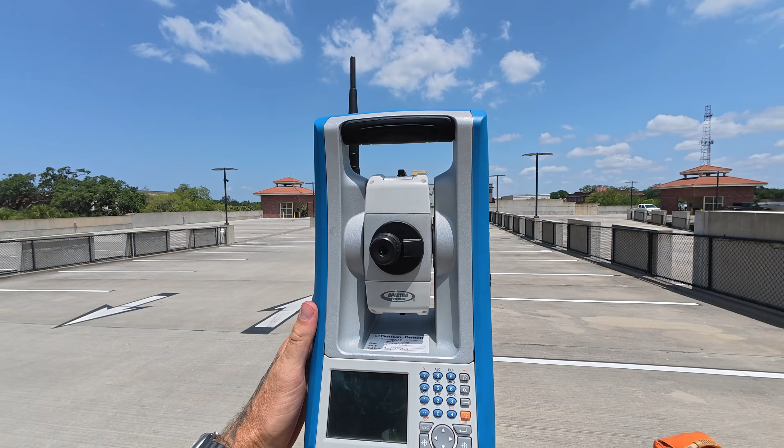Today is all about the vertical component of traversing, or using a total station to transfer the elevation from one point to another. We're going to cover how it's done, the errors associated with it, and I'm going to outline a novel technique to increase the vertical accuracy of your traverse to a point where it begins to rival what is capable using a differential level.

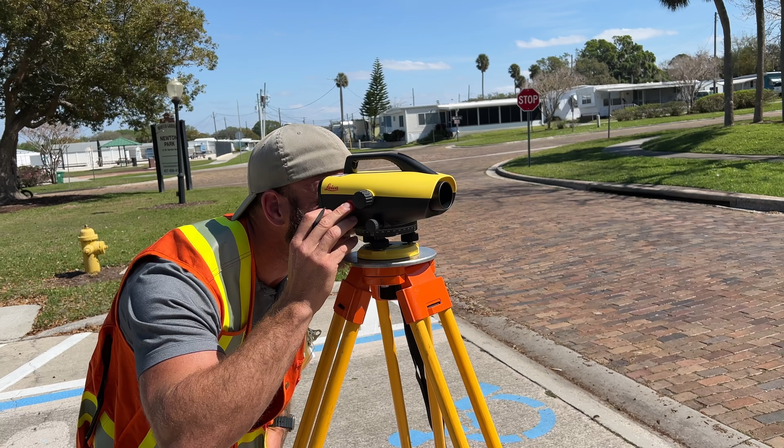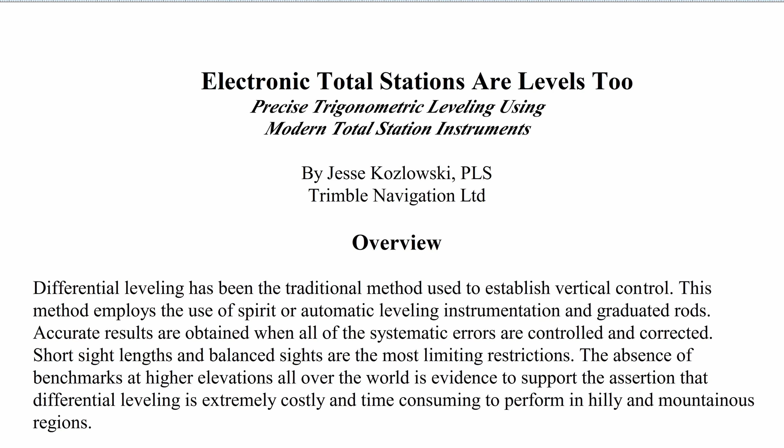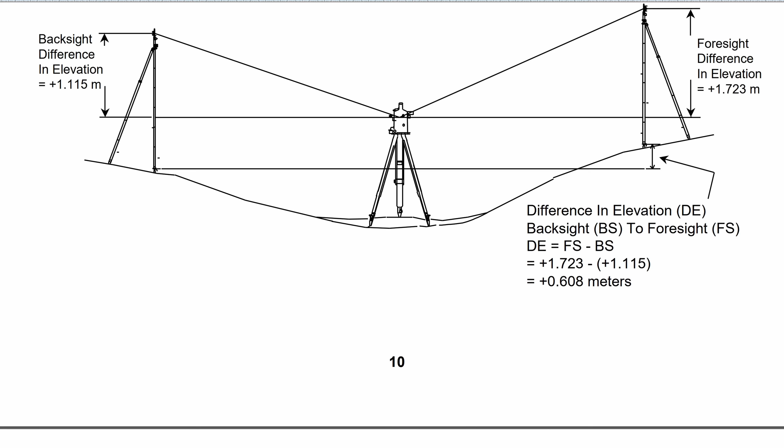A few weeks ago, I was sleuthing through LinkedIn when I came across a discussion on the merits of trigonometric leveling. In that conversation, a professional surveyor by the name of Jesse Kozlowski linked a paper he had written almost 30 years prior outlining a method of trig leveling that eliminates the largest source of error we surveyors encounter when transferring elevations using a total station, the manual measure-ups to the height of instrument and height of target.

As I read through Jesse's paper, I couldn't stop myself from trying to figure out a way to take the theory behind the method he was outlining and use it to increase the vertical accuracy of a traverse. You see, Jesse's method is for one-dimensional surveys, when all you're after is elevations. I wanted to tweak it to borrow the benefit of mathematically eliminating your measure-ups, but while still performing a traverse, which allows us to define horizontal coordinates at the same time.

So I poured a cup of coffee, popped in a Zyn, and got to work. After messing around with some old data in StarNet, I started to realize I was onto something. That was a few weeks ago, and since then, I've field tested this new method I'm proposing, and the initial results are very promising.

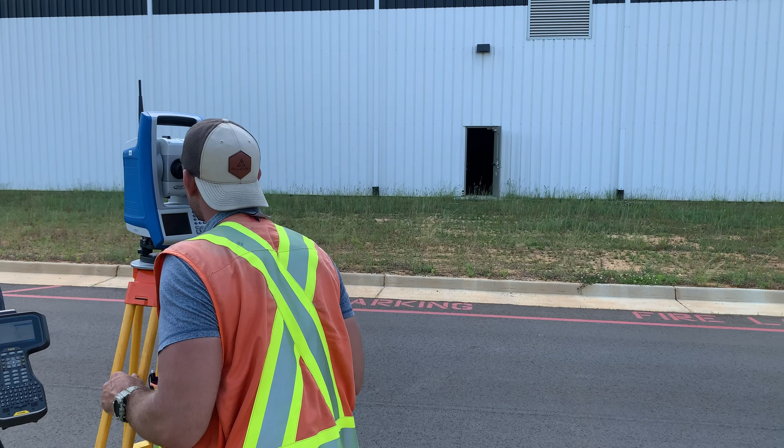I believe I'm now at a point where I can share this method with the surveying community to offer an alternative to those situations where you need highly accurate coordinates in all three dimensions that have in the past typically been performed by 2D traversing followed up with a differential level run. This method is significantly faster and carries several other benefits as well. Let's get after it.

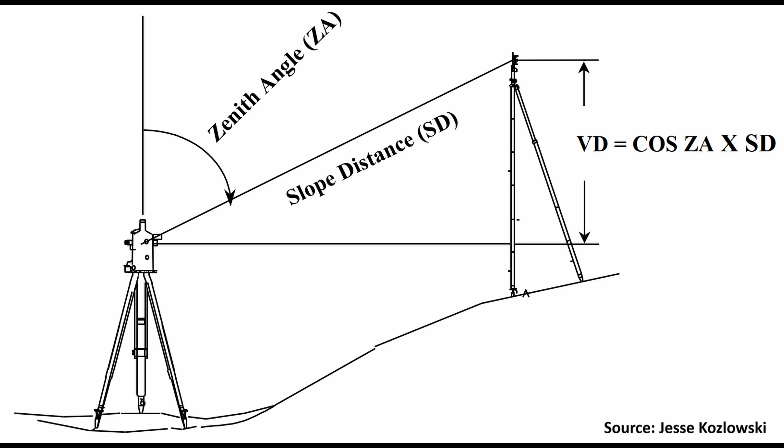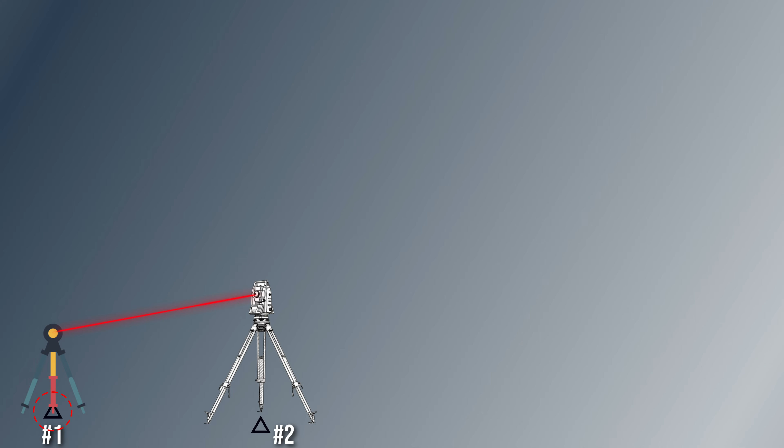Before we get into the fun stuff, let's get back to the basics. The theory behind using trigonometry combined with angles and distance measurements to transfer elevations from one point to another is actually fairly simple. Suppose we have a benchmark, let's call it point 1. If we were to set up our total station on another point, let's call it 2, and backsight that benchmark, we could define the elevation of the trunnion axis of our total station by taking the elevation of our benchmark, adding on the measured height of target, then adding the result of the cosine of our measured zenith angle multiplied by the measured slope distance.

We could then get the elevation of the point our instrument is set up over by projecting the measured height of instrument down, and determine the elevation of our foresight by using that same equation for height difference and subtracting our new height of target. Then we move our total station to the foresighted point, and this time, since we're set up on a point with a measured elevation, we can use our HI to get the elevation of our trunnion axis and continue on bumping the elevation from point to point in this manner.

Now that we understand the fundamentals, let's start diving a bit deeper and looking into the error sources affecting that relatively simple equation. Without understanding each and every error source that affects our measurements, it's pretty difficult to make a conscious effort to reduce them. I like to lump these sources of error into 4 groups. We have the hardware group, or instrumental errors. We have the setup group, or operational errors. We have the atmosphere group, or the environmental errors. And last but not least, the Earth model group, or geodetic errors.

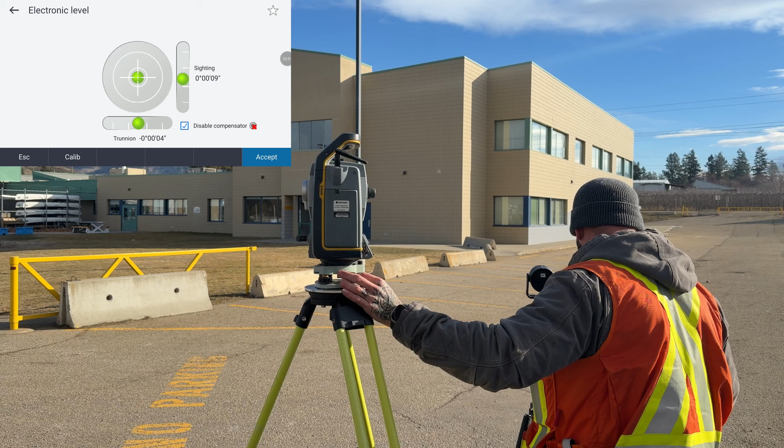First up in the hardware group, we have the compensator error. When we level our total station, the internal compensator is measuring gravity and aligning itself with a local gravity vector. And since any and every single measurement that ever has been made or ever will be made has error, we must consider the error introduced from the compensator measuring gravity, because that measured plumb line makes up one side of the zenith angle we use to measure a height difference. Most spec sheets will quote an accuracy value for this.

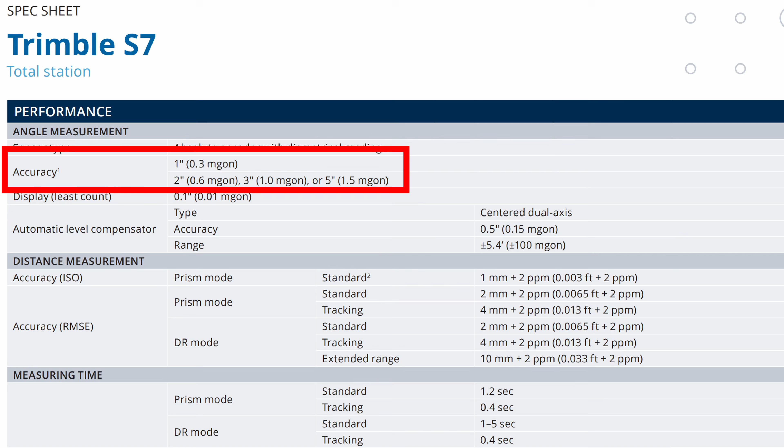Then there's the other side of the angle we just talked about, the angular precision of a dual face pointing of your total station. When you hear someone say a 1 second or 3 second total station, this is the error source that the accuracy spec refers to. Next, we have the vertical collimation, otherwise known as the index error. This is a systematic offset where the zero of the vertical circle doesn't perfectly match the true zenith. The good news with this error source is that it's eliminated by averaging direct and reverse, or dual face, measurements. It can also be mathematically removed via instrument calibration.

And let's not forget about our aiming errors. In this day and age, robotic total stations reduce this error via automatic target recognition, which has been proven time and again by peer-reviewed studies to be more precise than manual pointing.

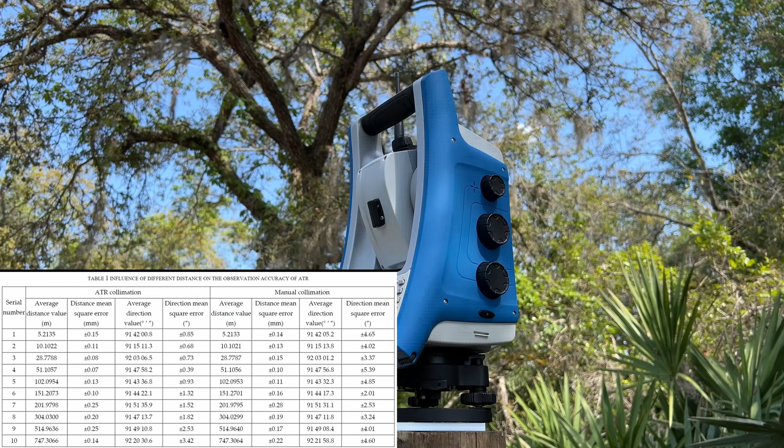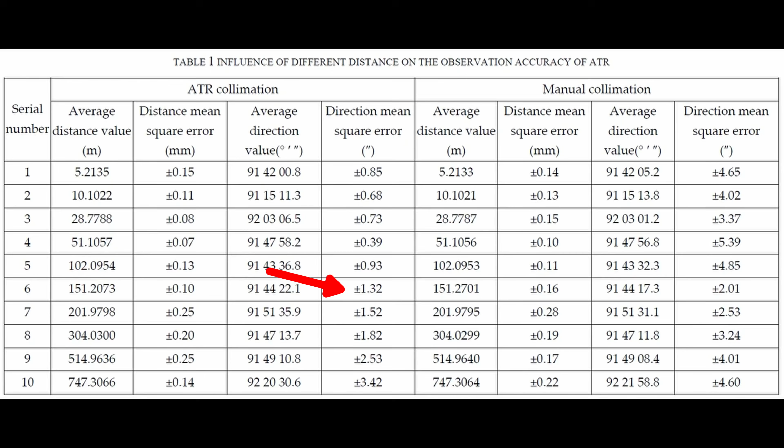That being said, ATR isn't perfect. Testing has shown there to be a sweet spot in the ATR's capabilities in regards to distance from prisms. So if you push your observations out too far, your ATR accuracy goes down, and surprisingly fast, I may add. And if your ATR is out of calibration, you will be introducing systematic error in the vertical component.

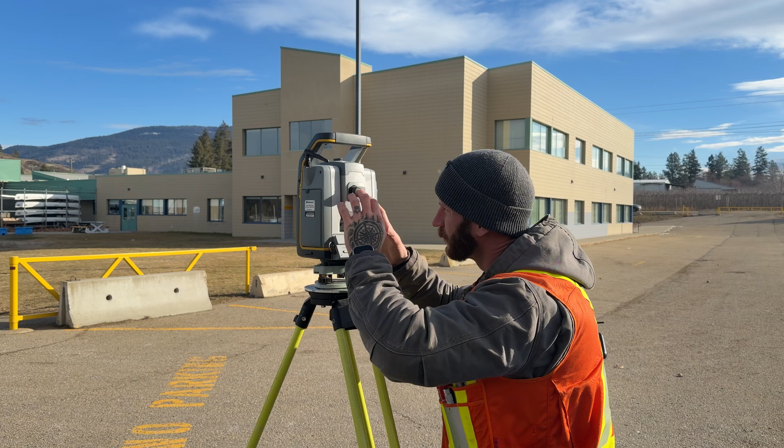When doing any high accuracy vertical work with your total station, it's very important to have a freshly calibrated automatic target recognition system. I have a long-form video on my channel about automatic target recognition for those interested in this subject.

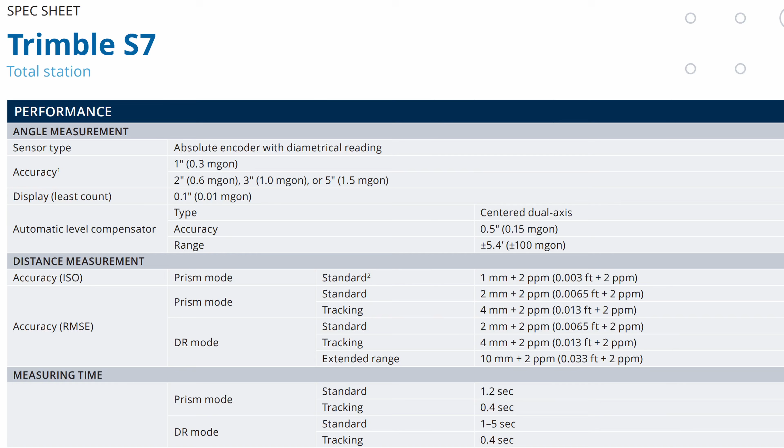And wrapping up error sources affecting the total station, we have EDM measurement error. Again, this can be found in your instrument spec sheet as both a fixed component along with a scalar value that grows with observation length and is denoted as ppm or parts per million. While these have a minimal impact on the elevation determination and the majority of their influence lies in horizontal positioning, I thought it was still worth mentioning.

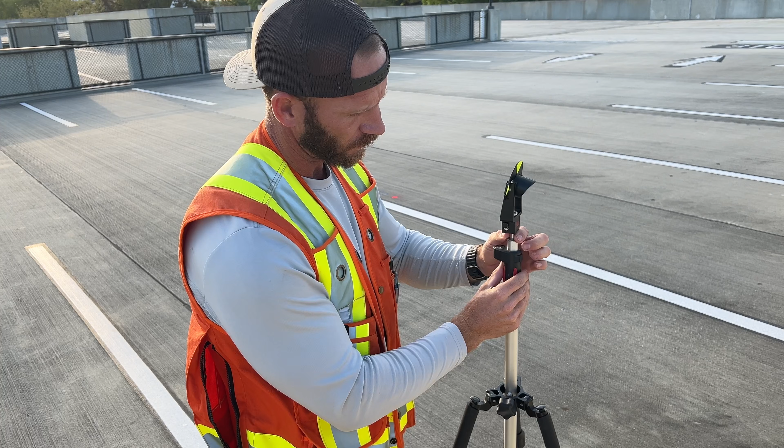A seldom thought about but significant error source affecting vertical accuracy of traversing is the thermal expansion of target poles. Let's say we have a target pole of 1.5 meters that was calibrated to that length at 20 degrees Celsius or room temperature. If we're out surveying in -10-degree weather or a temp swing of 30 degrees, our target pole will actually have shrunk by over 1 millimeter.

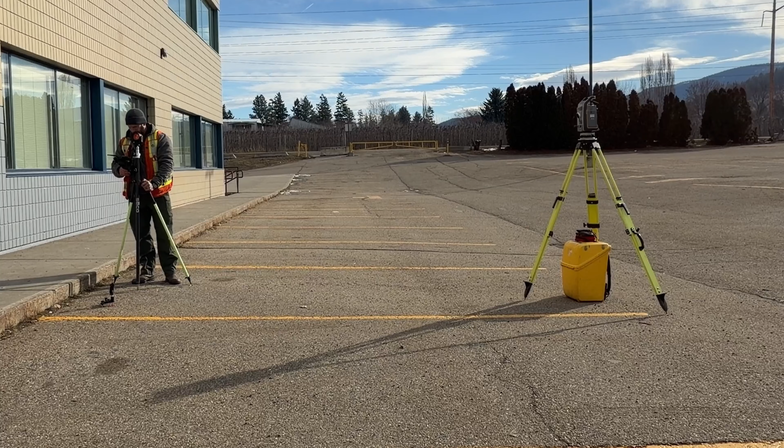And probably more important is a worn out prism pole tip that shrinks the height of your pole compared to what it once was. Every couple of weeks or when I get a new pole, I'll use my total station to measure the height of my pole by taking a number of measurements on a fixed height mini tripod on a point whose height I measured using digital calipers, and then take a series of measurements on the pole I'm trying to calibrate on that same point and compare the elevations.

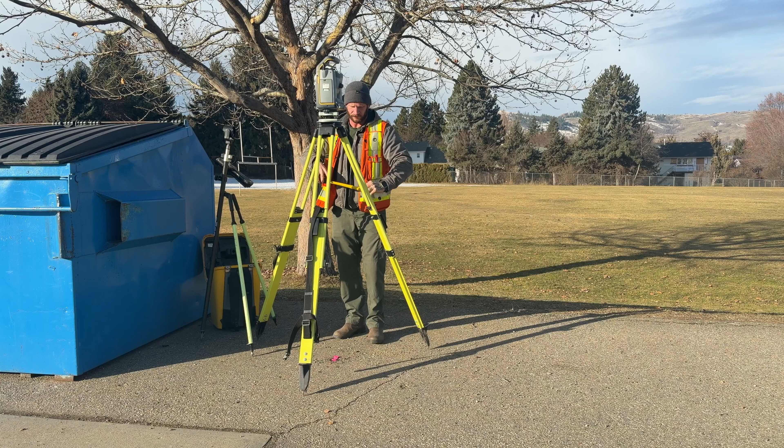The next group up to bat is the setup group or operational errors. This is where the human element comes into play and typically where the biggest accuracy killers reside. The most notorious error and the star of today's show is those height of instrument and height of target measure-ups. There are methods to reduce these errors. For example, I recommend checking your tape measure for systematic error. I use digital calipers to make sure that the start of my tape is set correctly.

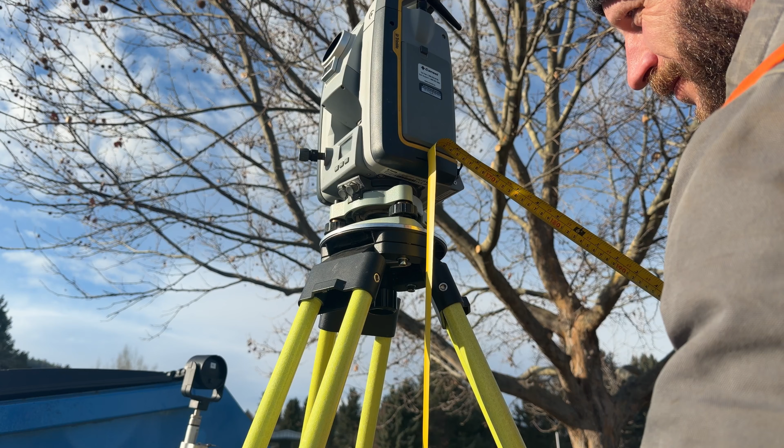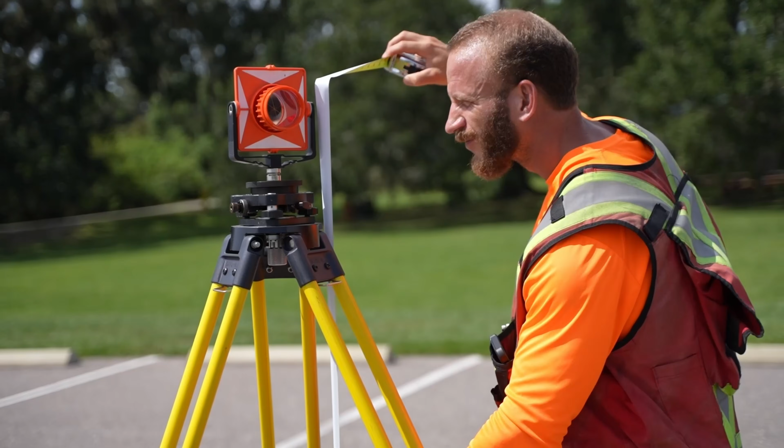I measure to the bottom notch of my S7 and Trimble Access automatically converts my slant height to a vertical one. If your instrument doesn't do this, you'll want to compensate for your slant measurement on your own. I use millimeters to measure height even when working in the United States, as it allows for more precision compared to guessing half hundredths of a foot. And height of target measurement error can be greatly reduced using a fixed height pole. Trying to measure the HT of a prism on a tribrach can be tricky to do very accurately.

We also have the vertical settlement of our instrument affecting our measured height differences. Typically, this won't introduce significant error, but it may, depending on your setup.

Group 3 is all about how the atmosphere affects our measurements. As light passes through temperature and density gradients, it literally bends towards the Earth. This error is proportional to the square of your distance, which is why keeping your sightlines under a couple of 100 meters or so can be advantageous when high accuracy is desired and you're working in highly refractive conditions. Most field software and post-processing software compensate for curvature and refraction together via the C plus R correction, but refraction isn't constant. Warm layers of air near the ground distort light more.

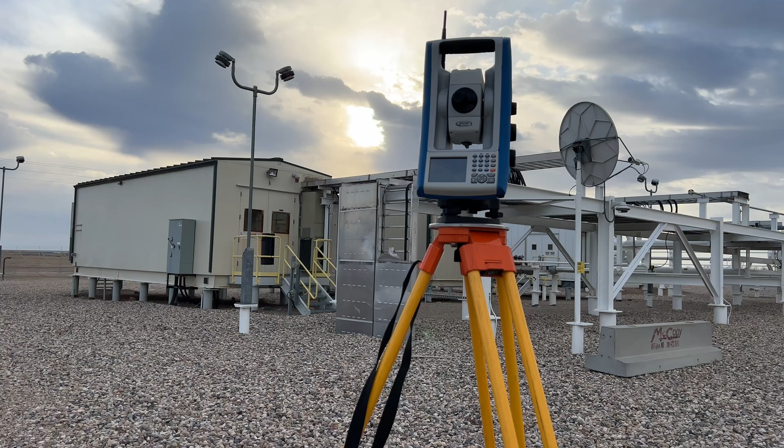An easy way to picture how refraction bends light is when you stick your arm into a pool and it looks like it's bending. Now the same thing is happening, but to a lesser extent when we sight our prism. Where we see the prism isn't actually the true location of the prism because the light is being bent as it travels through temperature gradients in the atmosphere. To mitigate this, don't use mini tripods on a hot day when the sun is cooking the asphalt. Cloudy days with stable temperature or working at night has advantages.

The fourth and final group are geodetic errors. Now there is so much to unpack here. We have the deflection of the vertical or the deviation between the plumb line measured at our instrument and the normal line to the ellipsoid at that location. We have the curvature correction, which I just talked about, but essentially the equation we used to calculate height difference assumes a flat Earth.

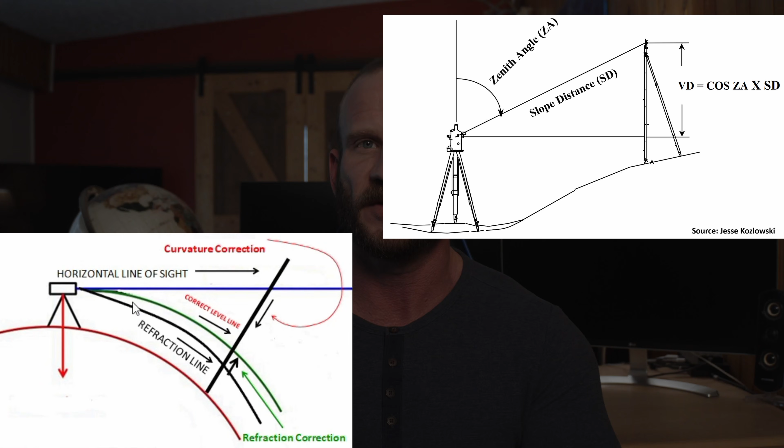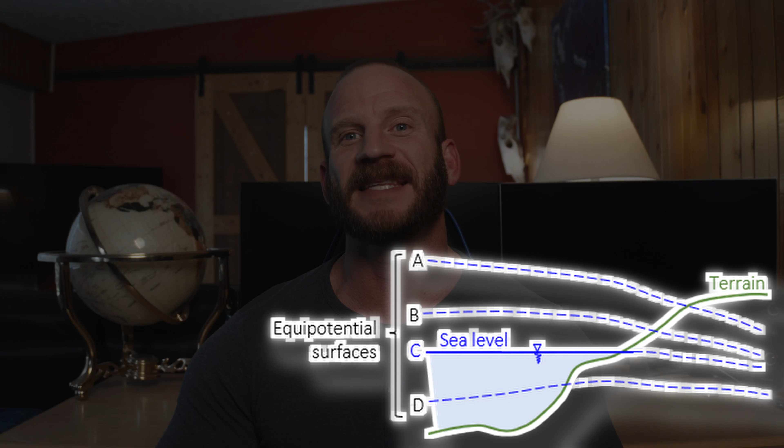So we must mathematically compensate for that, ideally using the specific radius at the instrument's location, but often an average value is used as well. And we have converging equipotential surfaces. Level surfaces are not parallel. They converge towards the poles because the Earth's gravity increases with latitude. Without an orthometric correction, even a perfectly measured loop will fail to close to zero mathematically.

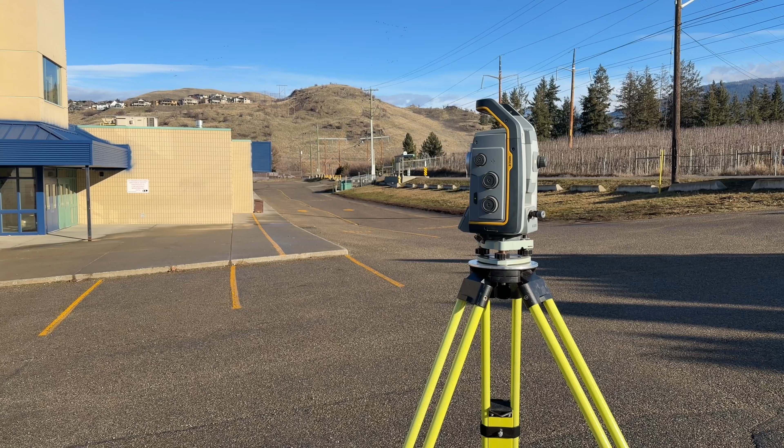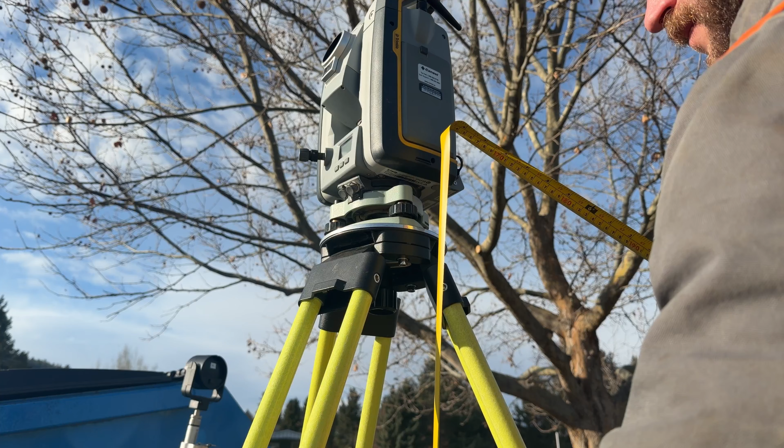The secret to moving your traverse into the first order category isn't just by buying a more expensive machine, it's by using field and office methodology that either eliminates or minimizes as many of these error sources as possible. And no better place to start than that error source that is often the one to blame when our closing traverse shot isn't what we had hoped we were going to get. Those HI and HT measure-ups.

We briefly talked about how to reduce HI and HT error, but we can take that a step further with some altered field methodology and advanced processing techniques. Like we saw in a traditional traverse, for every single setup, any error in our HI gets added on top of all the other vertical error sources. Likewise, HT measure-up error also gets dumped onto all of the other vertical error sources that affect its measurement. And since our traverse is building on top of each elevation set from the previous hub, that error tends to compound on itself as we make our way along.

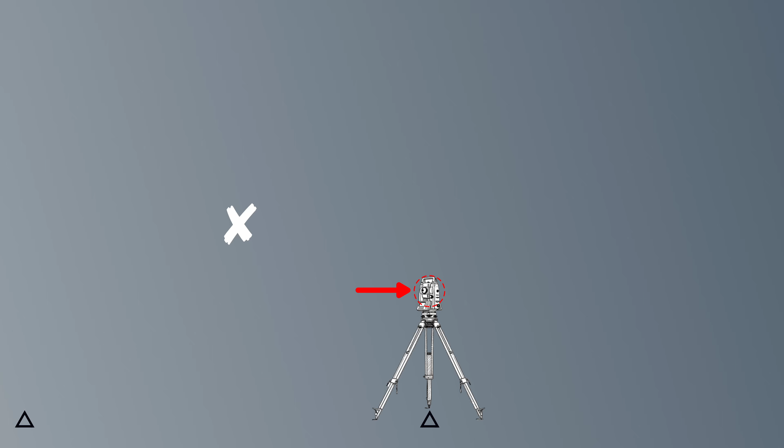What if we could leave a kind of temporary benchmark without measuring the height of target in between each backsight and foresight, and use that to temporarily hold and piggyback the traverse elevation down the run? A measured prism that we define the elevation of when sighting forwards, then grab that elevation when sighting back to define the height of the trunnion axis of your current setup, which you can then project to the next temporary benchmark. Well, that's essentially exactly what I'm proposing we do.

Going back to the example we started off with at the beginning of the video, this method starts off in very much the same way. But before we foresight our next traverse hub, we'll measure a point approximately halfway between our setup point and the next traverse hub. We have no requirement to ever set up on this point, and therefore we have a lot of freedom as to the kind of target used for this so-called common point.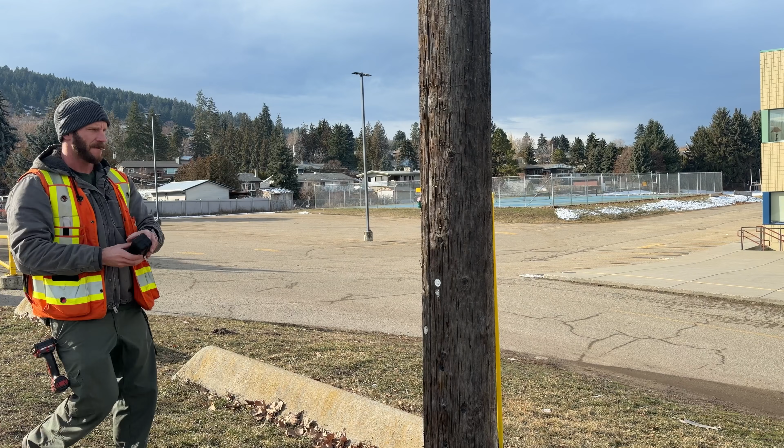If I'm traversing in an area with structure around, I like to use ball prisms that can be very quickly set on wooden or ferrous surfaces by using a screw-in steel adapter or the magnetic nest it comes with. If I'm out in the open, I can quickly set a temporary point and use a fixed height rod or tripod and tribrach. I'll measure rounds to my backsight, common point, and foresight. Then when I move to my foresight, I'll measure rounds to my backsight, the common point I already measured, my next foresight, and another common point to brace this next leg. Other than that, the field procedure for common point traversing is identical to a normal traverse.

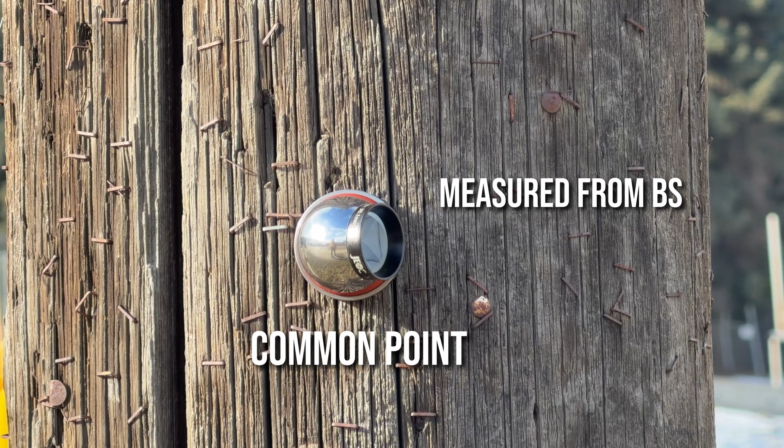And these so-called common points don't need to be physically in between each leg. Let's say you're traversing around a building. If you can set a point up above obstructions and see it from multiple setups, that's fine too. The key to this method is that there is a common measurement to a point whose height doesn't change from either end of whatever traverse leg you wish to fine-tune in post-processing.

What this essentially allows you to do is use these common points to hold the elevation that will be bumped along the traverse instead of relying on the elevations of each traverse hub to push the elevation down the line. The elevation of each traverse hub that's set up on will still be defined by your height of instrument measure-up, but any error in those measurements will only affect that specific traverse hub and won't compound into the network.

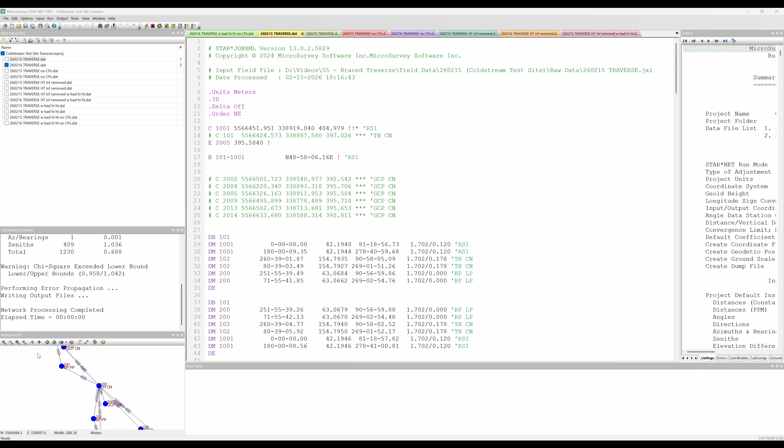Now that we have our traverse with common point ties between each leg, to remove the influence of the HTs and the HIs from the network elevation, we bring the raw observation data into a least squares adjustment program and remove all weighting from the zenith angles between traverse hubs. I use StarNet for this, but the process should be the same regardless of what least squares adjustment software you use, provided it gives you the capability to remove weighting from individual components of each observation. I don't want to remove the entire observation between traverse hubs, just the vertical component.

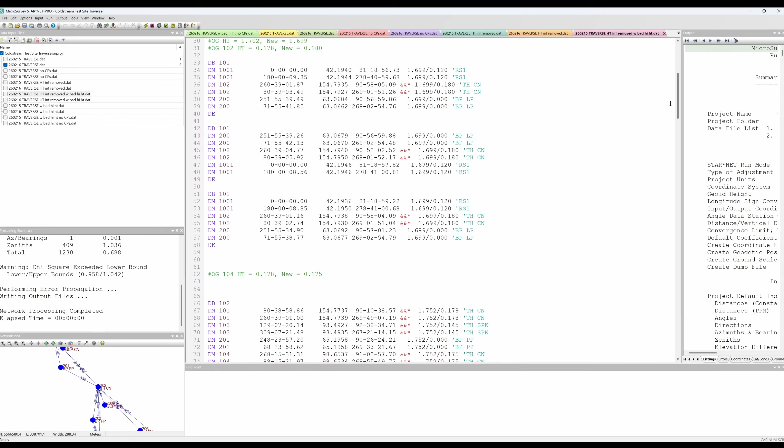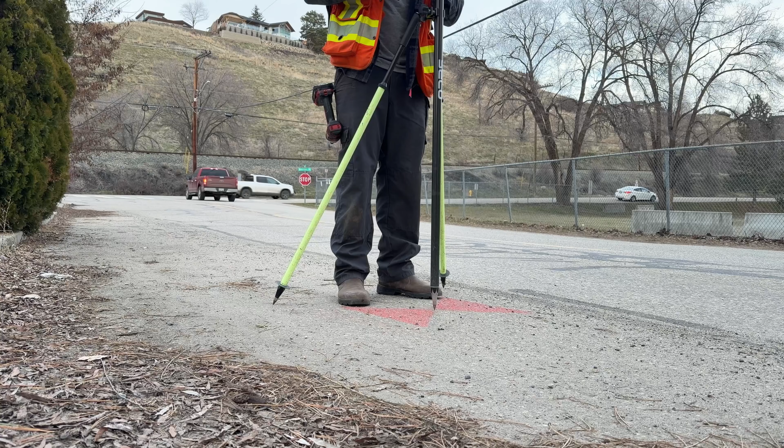To do this in StarNet, you use the fixity symbols ampersand, ampersand, star, inline the measurements between traverse hubs, which are my 100 series points in this example. The 200 series are my common points, and the 2000 series are just side shots to some ground control points I'm using for some aerial LiDAR testing.

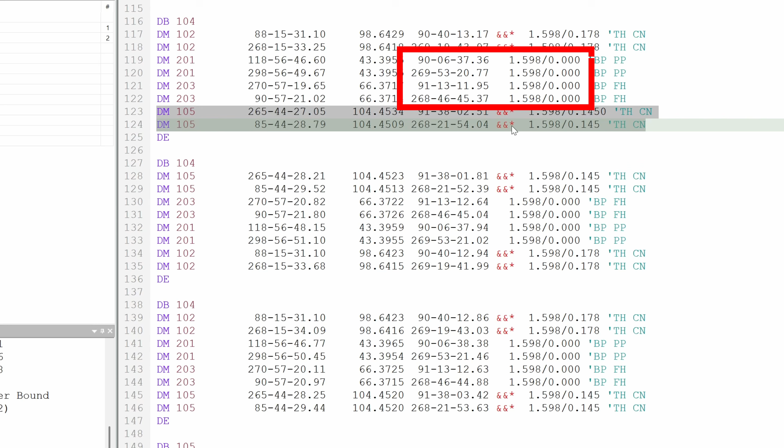This tells StarNet to ignore the vertical component of the backsight and foresight, which are tied to the HI and HT measurements, and instead only use the vertical component of the common point observations. The final elevation of each traverse hub will still be defined using the measured HI, but the elevation of the trunnion axis of the setup, and therefore each measurement made from that trunnion axis, is being defined by the common point observations. And since these common points aren't changing vertically between traverse hubs, it's mathematically removing the influence of the height of instrument or height of target measurement from the network elevation.

To field verify this common point or brace traversing methodology, I performed a 15 station traverse around a residential neighborhood that had a total length of 1,500 meters. All common points were ball prisms on either power poles, steel posts, or fire hydrants.

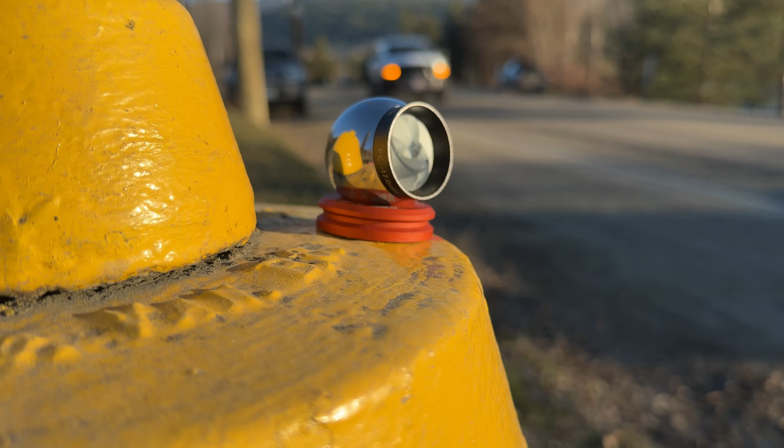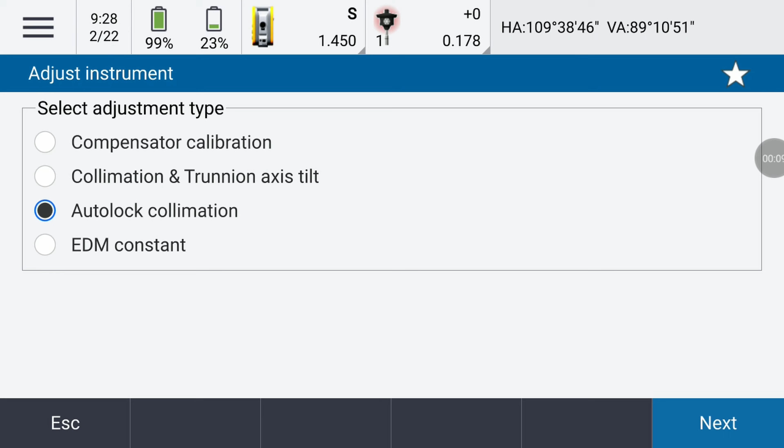Besides using common points, I did all my typical field calibrations prior to running control. Compensator calibration, ATR calibration, horizontal and vertical collimation calibration. I checked and adjusted my rod height. I checked my tape measure. I checked my optical plummet, so on and so forth. This method is going to help increase accuracy, but you still need to be on your game.

After post-processing my data in StarNet as is, without removing the influence of HIs and HTs yet, the vertical closure to the common point and traverse hub that I separated to create an open traverse was 1.1 millimeter and 1.0 millimeter. Truth be told, I was hoping for a larger vertical discrepancy to highlight the effectiveness of this post-processing technique, but it is what it is.

And even though I wasn't yet limiting the vertical component of the traverse to the common points, I was still using them. The adjustment was considering both the common points and the traverse hubs at this point. I then removed the common points from the adjustment to see what my vertical closure would have been had I never measured them in the first place, and the vertical closure on the traverse hub doubled to 2.4 millimeters.

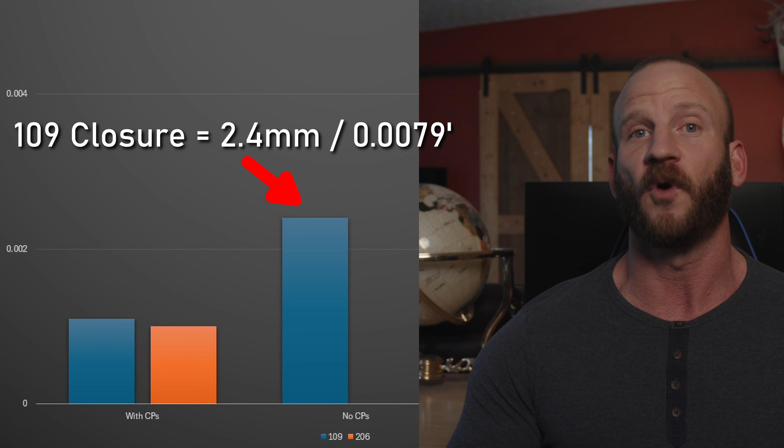And finally, I brought my common points back in and post-processed the data to remove the vertical component between traverse hubs, and thus the influence of those HIs and HTs. The final vertical closure for this 1,500 meter traverse was 0.4 millimeters and 0.2 millimeters.

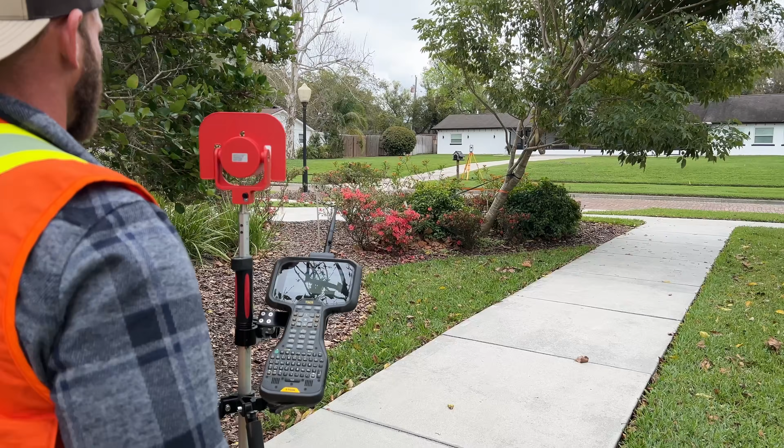The question as to whether or not the extra effort is worth it, now that's 100% valid. And that's a question I can't answer for you. It depends on the accuracy needs of your project. When I floated this idea on the RPLS forum, several surveyors raised the question as to whether or not the additional time to set and tie your common points is more than running a traditional horizontal traverse and then going back and running a differential level loop on all of your hubs.

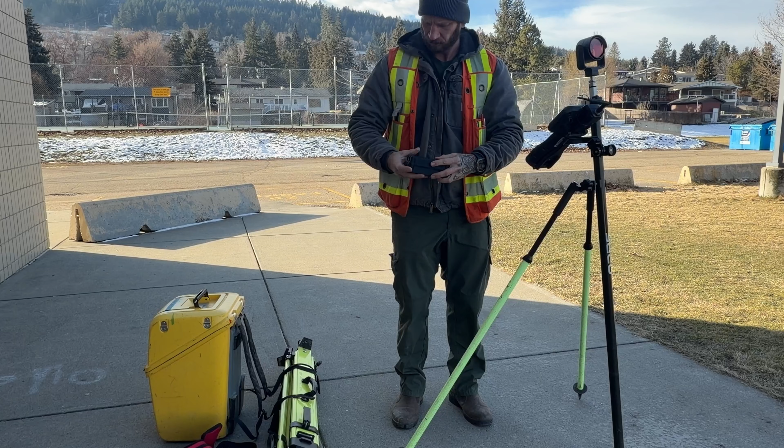Now, I can't speak for anyone else, but there's no question in my mind that there's no way that running a level loop on top of an existing traverse will be faster than setting and measuring a couple common points between each leg. Like previously mentioned, I use ball prisms and I can fit 2 setups inside of my 3D printed box I made. That case fits very easily in my vest pocket, and deploying a ball prism takes me maybe 15 seconds to set up and then another 15 seconds to take down and put away.

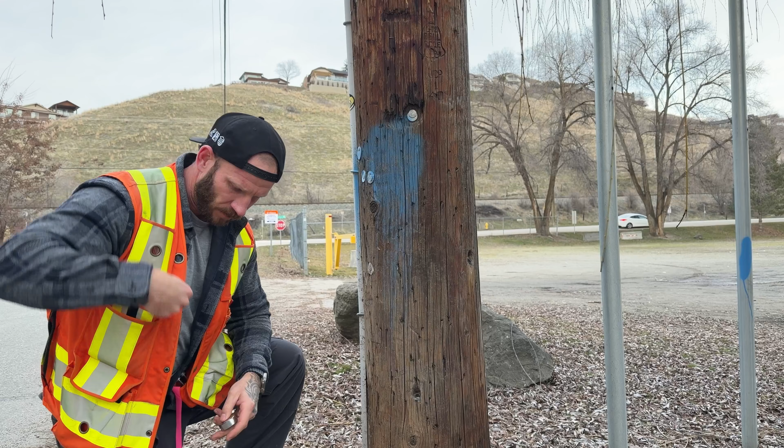If you're running full-size tripods and tribrachs, then yeah, that's going to slow you down, but that's typically not how I traverse. I run with 2 ball prisms and 2 mini tripod setups in my vest and carry my pole and bipod when obstructions or refraction considerations don't allow for the use of mini tripods. I'm mobile and I'm fast with this setup.

Now, running common points has other benefits too. Real-time blunder detection in the field because I'm triangulating every leg. And if a blunder sneaks by, I can recreate the traverse through those common points in post-processing. Not just vertically, but horizontally as well. I can run through this whole process solo, which I'm not able to do with differential leveling.

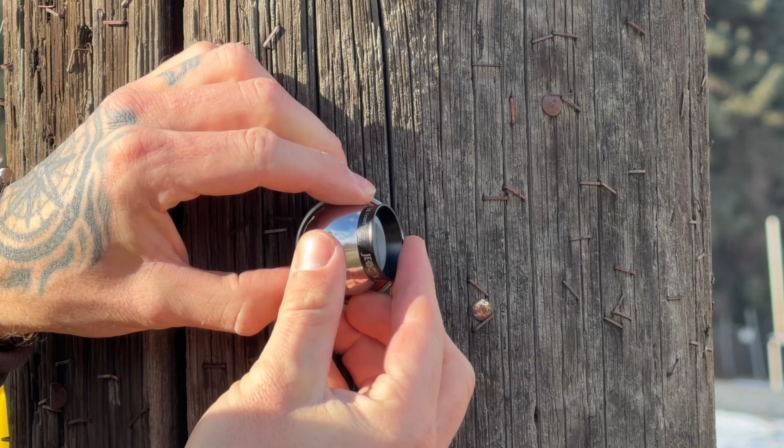And if I lose a bunch of traverse hubs that were on the ground 5 months from now and I need to come back and set up, oftentimes I can reestablish these common points as they're much less likely to be disturbed. My center punch on a fire hydrant isn't going anywhere, and I removed a common point on a power pole, then replaced it a day later to see what kind of centering error I was introducing. Honestly, I was not expecting to see great results, but in the end, it ended up being about 1 millimeter or so. I started marking my leg bolt holes in case I needed them in the future. A power pole obviously isn't extremely stable long term, but in a pinch, maybe.

I'm just not buying the argument that a 2D traverse plus a level run will be comparable from an effort standpoint to this method of traversing in most situations, but of course, there's always going to be exceptions. But when we start talking about working in areas with significant vertical relief, then the gap in time, effort, and quality between trig leveling and just differential leveling starts to widen even more, but that's a topic for another video.

I'd like to thank Jesse Kozlowski for both writing the paper that inspired this methodology and taking the time to sit down with me and let me pick his brain about trig leveling. Likewise Austin Blaney, who shared some of the insights he gathered over the years setting ridiculously accurate dimensional control, and James Johnston of StarNet for letting me bounce ideas off him to get this method across the finish line. I've said it before and I'll say it again. Being fortunate enough to converse and learn from the legends of the surveying industry is by far the most rewarding part of making these videos.